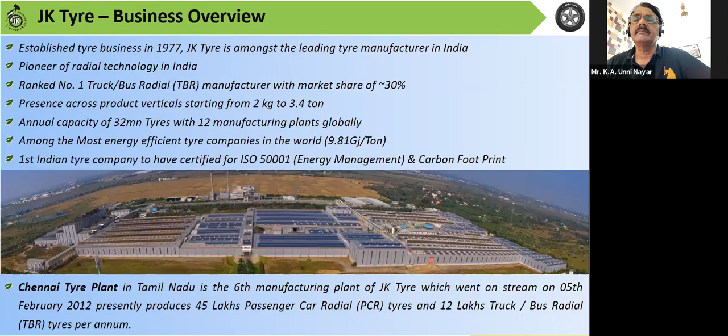Now I'll give a few exclusive features of our plant. You'll agree it's situated in the automobile hub - Chennai is an automobile hub. It's a state-of-art manufacturing plant, a modular design plant.

What does modular design mean? There is a lot of space still - if we want to expand, the next section can be expanded and merged with this one. We will not require any shutdown, maximum a one-shift shutdown, just to mix this with that.

It's a highly optimized WIP movement, because we did not want to waste any manpower or waste resources. It's a zero discharge plant, which is also a mandatory requirement, and we have used maximum sunlight and renewable energy. We have our own rooftop solar systems and a lot of windmills contracted for 10 years. Practically, for the last 3 months, our renewable energy usage was 100% - we did not take any fossil fuel energy power at all.

But on a year average, because now the wind is good, on a year average, we are close to about 50-52%. Then manpower, it's a very important factor of any other.

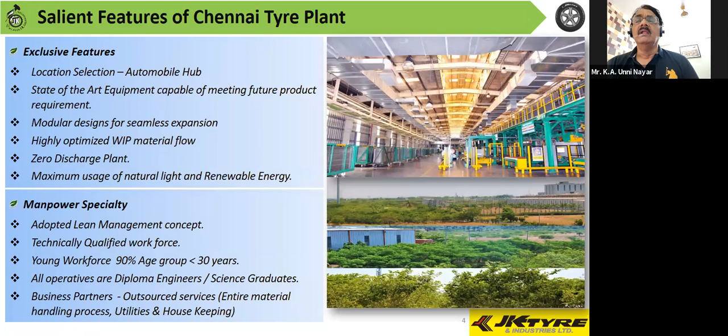We do have a very lean structure, and we have all technically qualified workforce. Then a very young workforce, more than 90% are less than 30 years of age. Our starting is all diploma engineers and science graduates only we take, mainly because all ours is automated process, and to run this we wanted educated people so that we can train them better. And then we have outsourced a lot of our operations to renowned agencies in terms of utility, housekeeping, running the boilers, or material handling.

These are the two segments. Passenger car segment, that is known as the segment which is going for the car, jeep, and SUV and the light trucks, and the truck bus segment. That is, it is going to the truck and the bus. These are our different varieties of this segment, and we do have a lot of SKUs. SKUs means different sizes we make, and in both the tubeless and the tube variants we are making as per the requirement of the original manufacturers.

We are a major original manufacturer suppliers. We are supplying to most of the companies across India. We ourselves are supplying from our plant to Hyundai, Renault, Nissan, Mahindra and Mahindra, Tata Motors, then Ashok Leyland, Volvo, MSI, Maruti, then Kia is going to start again. Ford we are going to touch upon. So practically we are supplying to all the OEMs. Supplying to OEM is also a very good experience and quite a challenge, because we have to meet our tire design to the equipment design or the model design of that vehicle.

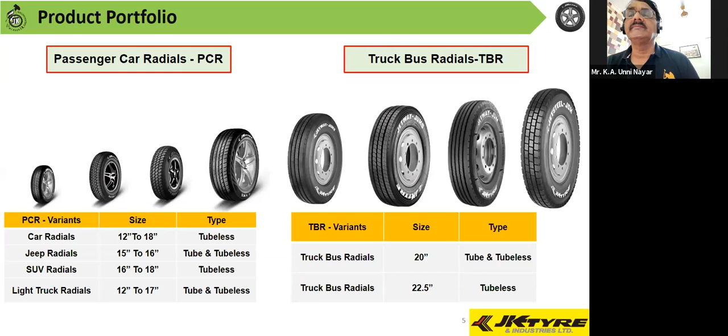These are our supplies, which already I touched upon. Also, we supply a lot to the state transport corporations of Tamil Nadu, Kerala, Andhra Pradesh, and Maharashtra. We also supply to Karnataka, but Karnataka is supplied from our Mysore plant.

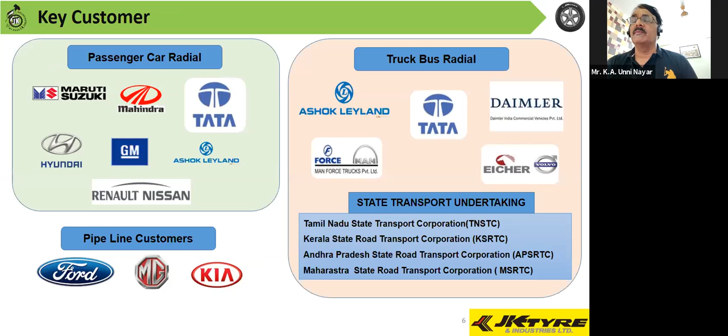So these are our product and system certification. We are practically having all the certification of all the systems, quality system, ISO, TS 16949, environment management 14001, OHSAS and energy. Then we do have carbon footprint, social accountability, information security, NABL for both our labs, then quality IATF and 45001 for our safety.

And then for the product, this product certification is required mainly for our export. BIS is required for all the product we sell in India. And the DOT for the USA, ECE for Europe, InMetro for Brazil, LATU for Uruguay, and SNI for Indonesia. All this is a 2-year certification. Every 2 years we have to renew this, and unless we have this, we cannot export.

Our export is also very good. We are exporting to the extent of about 30% of our product goes across the globe.

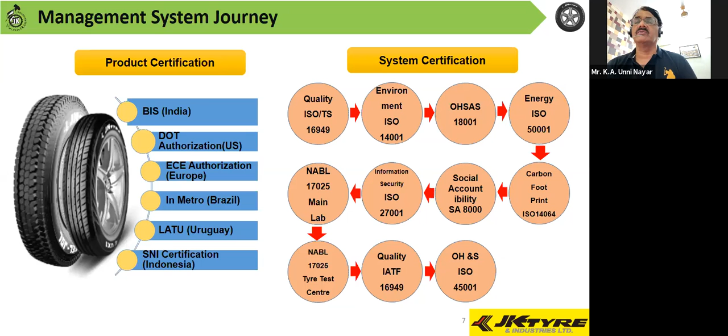Then we are a certified zero waste landfill. This assessment, this is a copy of the assessment report. This is done by BSI. We have done a formal assessment by them. They have come and audited the plant and given the certification for a period of 18-19. 19-20 again we will have to do it, and this year they will come and assess what procedures we are doing, and how they will verify, before this certification is given.

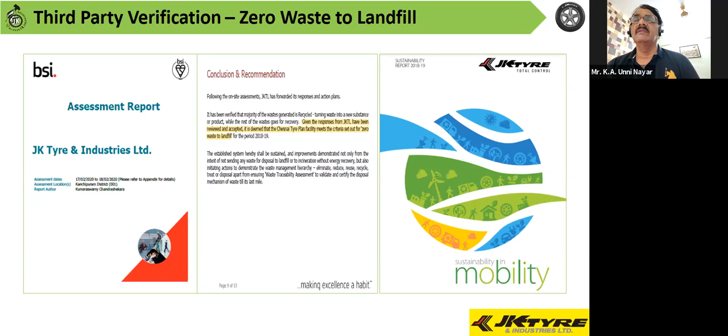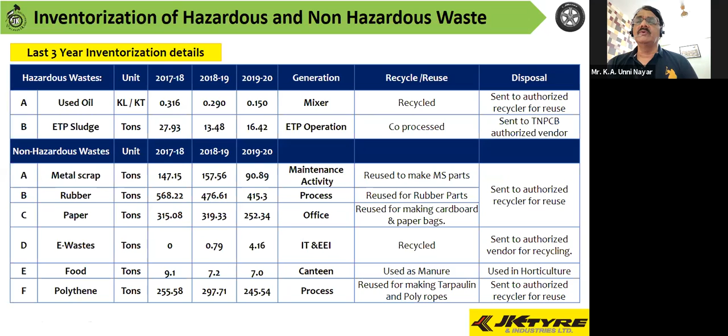Thank you very much. As part of the green journey of JK Tyre Chennai Tyre Plant, we started focusing on sustainability parameters. One key area is waste management, zero waste to landfill. To start, we did an inventorization of the waste, classifying both hazardous and non-hazardous waste. In our tire manufacturing process, hazardous waste generally comes from ETP sludge, an output of the effluent treatment plant, and used oil, an output of the hydraulic system, gearbox, and processes. Non-hazardous waste includes metal scrap, rubber, paper, e-waste, food, and polythene.

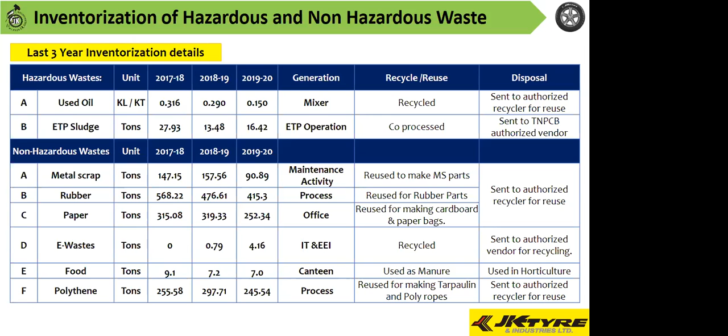First we did inventorization of hazardous and non-hazardous waste, collecting the inventory from our plant inception onwards. In this slide, I have projected the last 3 years of our waste inventory. Following this, we used an end-of-life cycle treatment approach for all waste generated in our operations, understanding each waste generation source - the point where waste has been generated - and what treatment we need to do after end of life, so we can understand whether the waste can be recycled or reused, whether recycling can be done online or offline, and the disposal mechanism, so it can be properly disposed and used as input raw material for other industries. So we have approached this through the concept of end of life cycle.

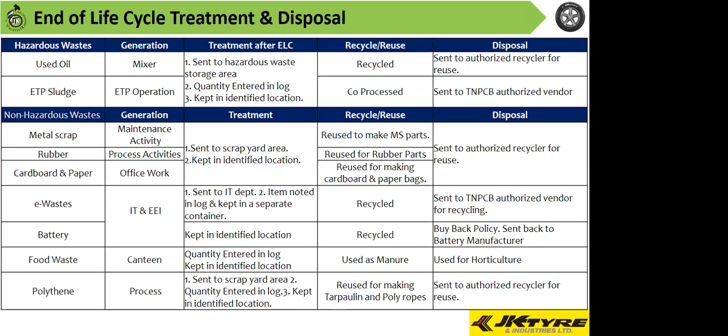This slide talks about the recyclability of the waste, giving an overview of our plant waste management. Hazardous waste consists of two types: used oil and ETP sludge. Used oil we are 100% recycling, zero landfill. For ETP sludge, we have a process to follow. Presently we send it to a secure landfill, but we are considering co-processing, and we have discussed with vendors about converting it into input material for paver blocks or bricks. So we have a plan for that ETP sludge also. For non-hazardous waste, 100% is sent to recyclers, and we conduct verification audits at vendor sites to ensure our waste is properly sent to a recycler, so vendors don't misuse our waste and it's properly disposed. In this manner, we are ensuring our focus towards zero landfill.

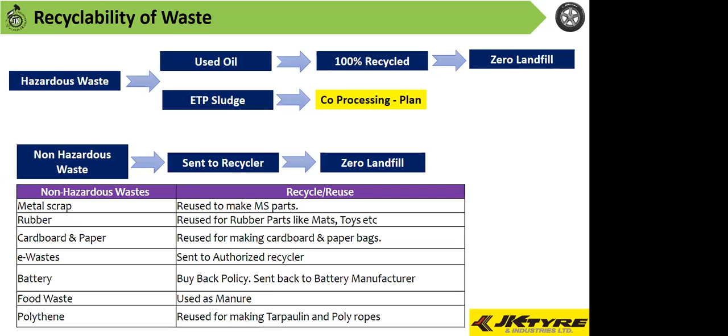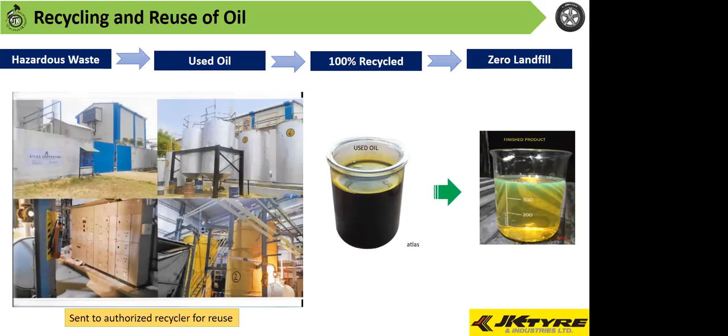This slide talks about hazardous waste, meaning used oil. We give it to an authorized recycler for reuse. This is our input material, used oil, which we give to the recycler in this manner. We have audited what they do with our used oil, and they convert and reuse it, selling it back to other industries for reuse.

As rightly said by our VP sir and chairman sir, we should focus more on reducing waste rather than disposing, landfilling, or recycling it. So our main focus for waste management starts with reducing waste generation, so that only a minimum amount goes for recycling or reuse.

As a process for oil, we implemented an oil management program. We procured an electrostatic liquid cleaner, magnetic filtration, and low vacuum dehydrator machines, which have been fixed online in the equipment itself, in the hydraulic system, so that online recycling of the oil happens, increasing the life of the oil being used.

So on average, oil life will be increased to 3 to 5 years rather than replacing it on a yearly frequency. The trend shows that over the last 3 years,

a 53.1% reduction in used oil generation has been achieved. This results in cost savings as well, around 3 lakhs per annum has been saved. Offline reclamation quantity was around 4,415 liters in 2019-20. In addition, this improves the life of the machine parts, which is one of the most important factors.

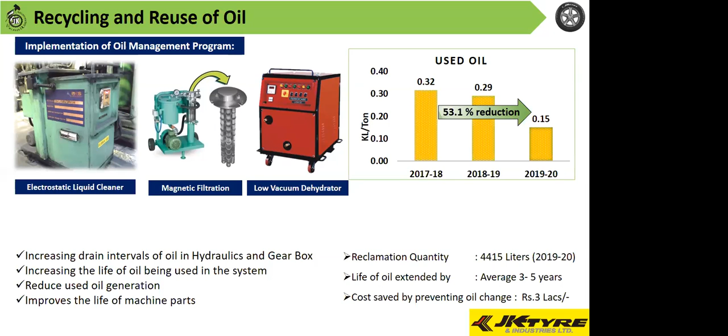Next is reduction in ETP sludge generation. The trend shows that over the last 4 years, we have achieved a 40.3% reduction, and this year we will be reducing it further because of the projects we have taken up.

Some of the projects we have displayed here include installation of a double stage RO and stopping DM plant activity to reduce effluent generation, and installation of an RO stage in ETP to reduce MEE operation and salt generation.

UF reject water is now used as service water instead of being sent to ETP. So wherever there is an input source that can be recycled or reused, we stop sending that water to ETP, so that effluent generation is reduced. These are the projects we have taken up.

We have also optimized the use of chemicals. OEM prescribed certain norms, but based on our trial and error mechanism and analysis, we have already optimized chemical usage in the ETP operation, so that our sludge generation is reduced.

Recently, we started using TTRO water for the process requirement. This is one of the major changes we made in the process, so that our ETP sludge generation is reduced significantly in quantity.

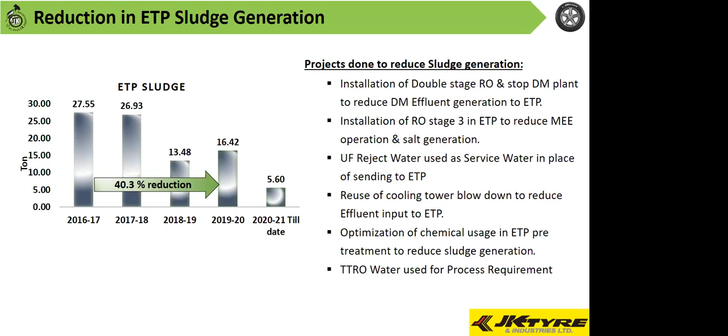Some of the projects include installation of double stage RO, IRF, and UF to reduce effluent generation. One of the prime sources of effluent is DM plant regeneration water, so we replaced the DM plant with double stage RO, so that the DM plant effluent output is completely eliminated.

We also installed IRF and UF systems before the RO process to avoid frequent cleaning of the RO system. As a result, 15 KLD of water that was going to the ETP plant has been completely stopped, which reduces sludge generation.

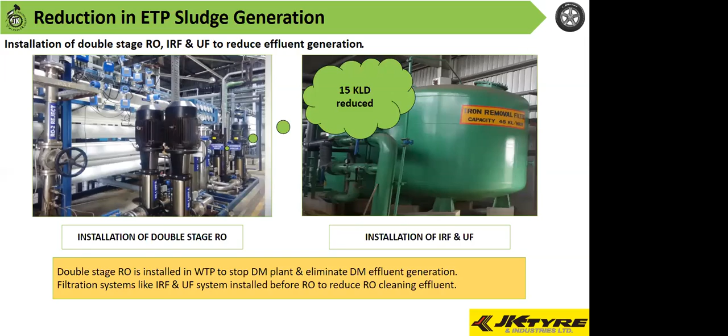The next project is that UF reject water is recycled and used as service water. We installed a UF station to reduce ETP sludge, but UF also produces some reject water.

Based on analysis of the reject water quality, we found this water can be directly used as service water in place of fresh water, further reducing input to the ETP. This saves around 45 KLD of fresh water, and sludge generation is also reduced.

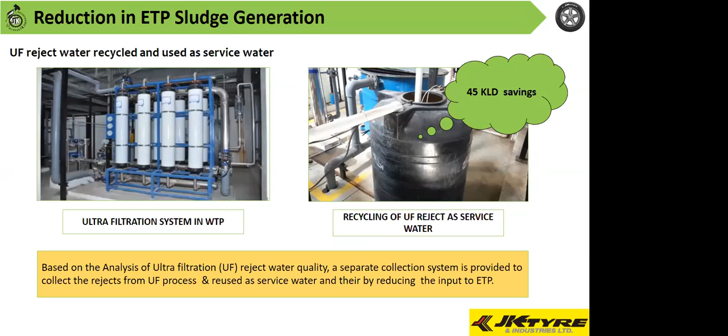Another project involves the VAM cooling tower blowdown, which earlier was an input source for the ETP plant, where it was further processed, with the final output being ETP sludge generation.

We analyzed the blowdown quality and TDS level, and found this blowdown water can be used as a makeup for another cooling tower, the ejector cooling tower, so that effluent input to ETP and resulting sludge generation are reduced.

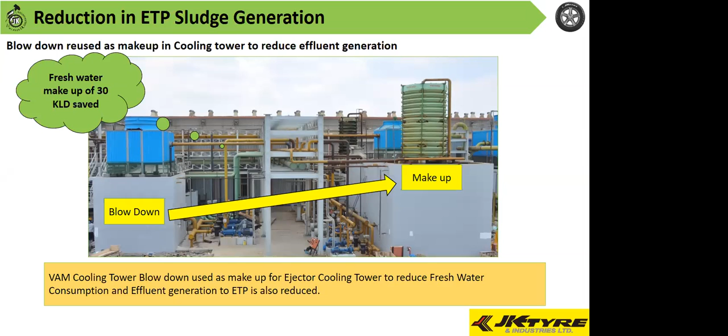These are the various projects we have taken up, and recently, last year, we started using TTRO water for our process requirement. Generally the chemical dosage is high in the clarifying process, followed by the RO process, whose results become input for the ETP.

Once we started using TTRO water, since it is already treated RO water, the clarifying process was directly stopped, completely eliminating the input chemical we had previously used.

This directly reduces the sludge generation, and we have eliminated one RO stage, so the RO reject water also does not go to the ETP. So finally our ETP sludge generation will be reduced. Presently it is still 5 tons this year. We are aiming this year it will be further reduced, so that compared to last year, this year will be half the quantity of sludge generation. That's the aim we have taken.

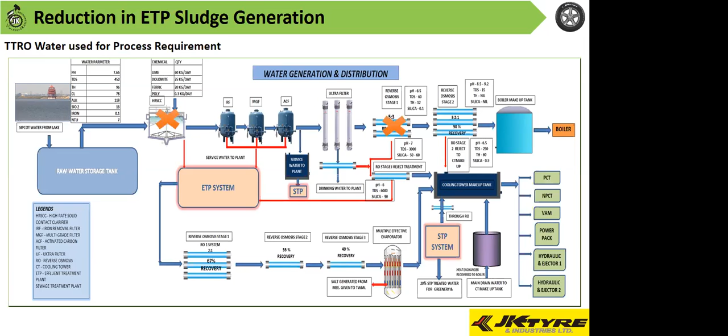So still now we talked about hazardous waste management, and one of the interesting and innovative thought processes in our plant is that we need biomass for fossil replacement. Since our boiler is coal-fired, and our curing process needs steam for vulcanization, we were using traditional coal as input for boiler operation. So from a sustainability perspective, we started using biomass for coal replacement. Around 20% of biomass we have substituted and are using.

So what we thought was that vegetation waste, which is generated in our plant from the 54 acres kept for future expansion, could be used as fuel for the boiler. Disposing of this vegetation waste was also a big problem for us, because in the empty 54-acre future expansion area, there was huge vegetation waste. So disposal also became a problem.

So we in-house designed a shredder machine to achieve the required particle size for mixing during boiler feed. Based on this process, we saved 50 metric tons of coal per month. And parallelly, we replaced some percentage of coal in the process.

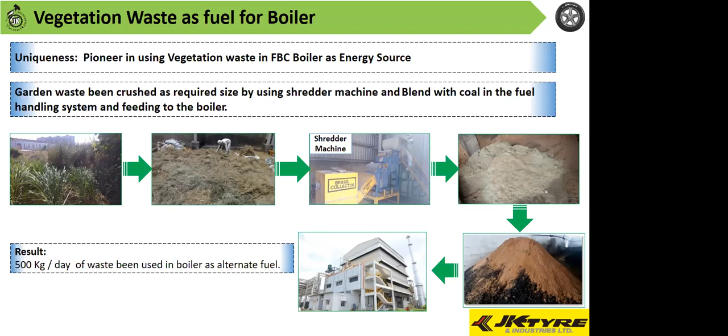Boiler fly ash is also used as raw material. 100% of the fly ash is disposed to a brick manufacturer, which is a TNPCB-approved agency. This is one of the environmentally friendly initiatives we have taken, and we send the fly ash in closed containers. That's one of the important points I need to project here.

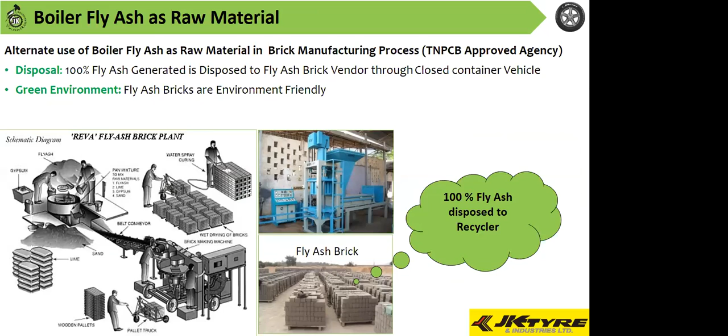We have a strong policy of conservation, reusing, recycling, and composting everything. As part of this, all the metal scrap generated during our activities is reused. For example, our raw material comes with some steel rolls, and our equipment also comes with some protection made of steel. So whatever scrap steel material we have, we use in-house for storage purposes. We made racks from scrap steel for storing our compound, and we use it for storing tool items like molds. Ramps and supports are also made from scrap steel, as well as barricades, pathways, and disabled movement guidelines. So this is about the metal scrap.

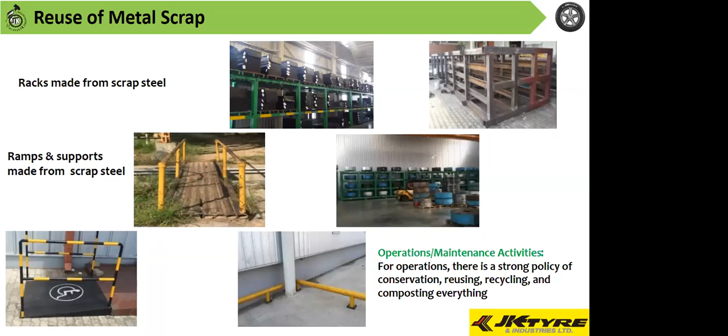Then food waste management - we have a strong policy that we should not waste food, because food is one of the items which serves basic needs. So we started displaying daily how much food has been wasted in the canteen area itself, and we displayed many posters in the kitchen and canteen areas so our employees will see and understand about food waste. We closely monitor on a daily and shift basis how much food has been wasted. Over the last 3 years the trend shows wastage is very minimal - we serve around 2,000 employees on average, and our waste for the day is only around 20 to 30 kg. In that close manner we monitor and reduce food wastage.

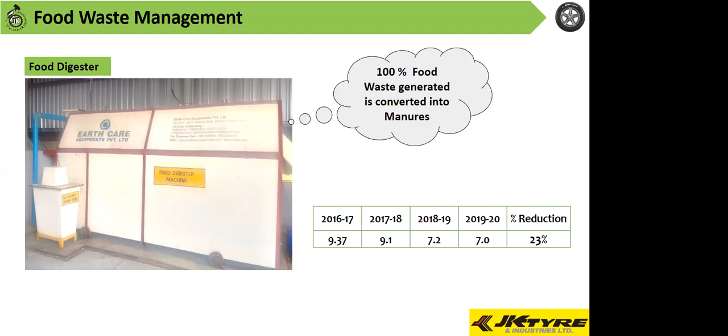And that 20 kg, we convert 100% into manure from food waste. We installed a food digester in our plant, so whatever minimal waste is generated, we collect and convert it into manure, because we have a huge amount of vegetation, and this manure supports the vegetation.

As a green procurement guideline, we started receiving rubber 100% through recyclable packing material, that is through good packs and open trucks. We are not using any wrapped material or HDPE bags to receive the rubber. This has been strongly incorporated into our purchasing policy, and the purchase order will go along with these requirements to the vendors.

For carbon black, earlier we received silica in 25 kg HDPE (high density polyethylene) bags, which after use would go as scrap. Now, instead of receiving small lots, we procure through jumbo bags. So all the carbon black and silica we receive through jumbo bags, which also helps waste management, disposal, and logistic efficiency.

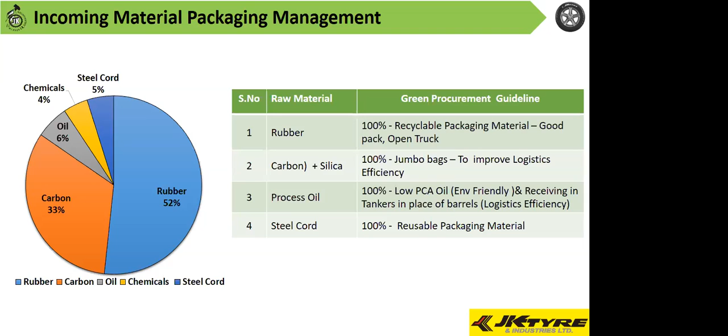Some examples are shown here: natural rubber, in place of using wooden pallets. Earlier it was received in wooden pallets; now we receive it in open trucks and store it in gondolas specially designed for rubber storage, then store it in good pack materials, which are recyclable, reusable, and can be sent back to the vendors.

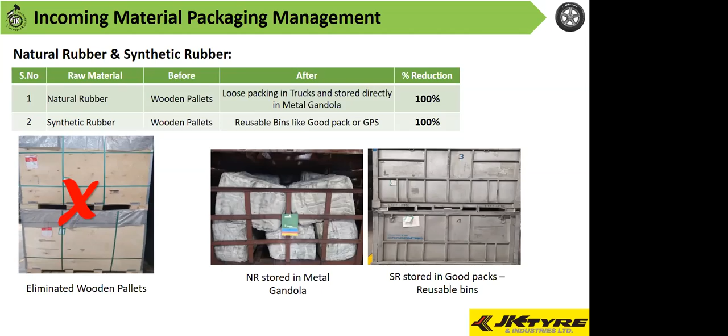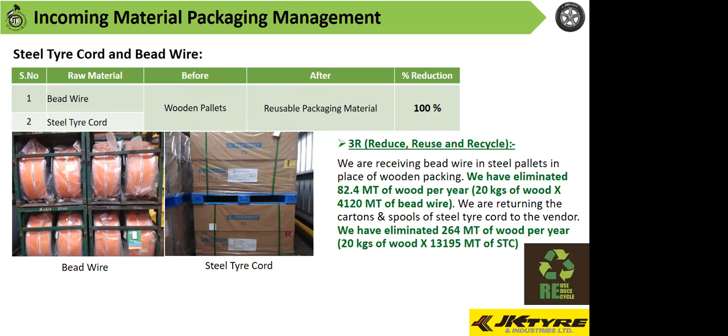Now we will talk about biomedical waste management. We have a dedicated occupational health center which is highly facilitated, and we have a 24/7 doctor facility also.

We quantify the biomedical waste also; it is very minimal for the year because we have a strong philosophy and concept of occupational health and safety. We have a strong team to take care of our employees on OHS, and we always move towards a proactive approach in safety management. As mentioned, we have also received a Sword of Honor award last year.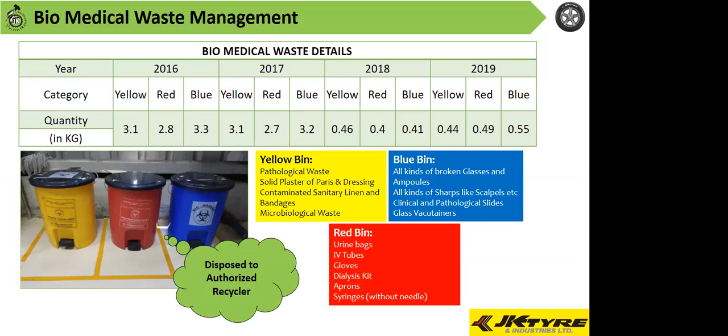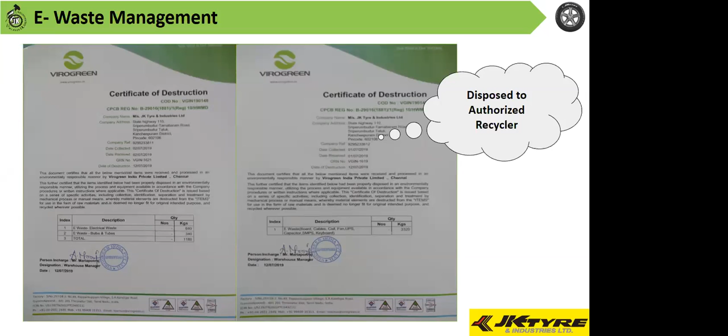At the end of the presentation, we are not stopping here; it's a continuous journey. We have started and we move continuously towards this goal, and this year we have planned for plastic no-use protocol certification also. Our aim is to completely eliminate plastic in our process, so this year we are definitely working to get plastic no-use certification. We have derived many policies and strategies to remove plastic from our plant.